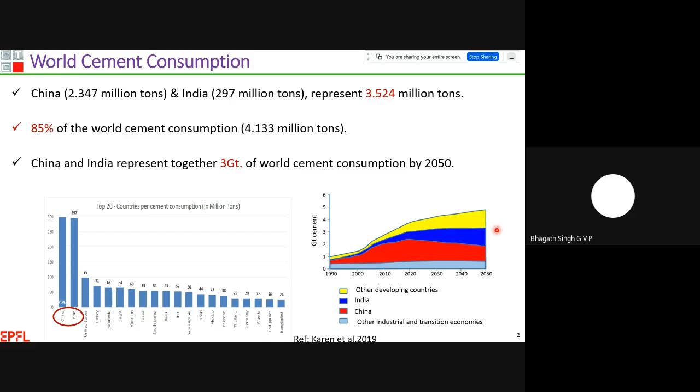During the cement production process, we release about 5 to 10% of anthropogenic carbon dioxide into the atmosphere, and we also consume virgin materials such as limestone and clay. Considering all these factors, we have to work towards the development of alternative sustainable materials to meet the required demand of cement in the construction sector.

If you look at the composition of the earth's crust, it generally consists of predominant elements: silica, alumina, iron, calcium, sodium, potassium, magnesium, and others. Whatever materials we use or produce, these elements should more or less be present in those materials. Let me show an example—this is the typical composition of the earth's crust.

If you compare this with cement composition, the same elements are present but in various quantities. In the earth's crust we have a significant quantity of silica as sand or clay, whereas in cement we have significant calcium, followed by silica, alumina, iron, and other elements. What I'm trying to say is that whatever materials we produce, these elements should be present in different quantities.

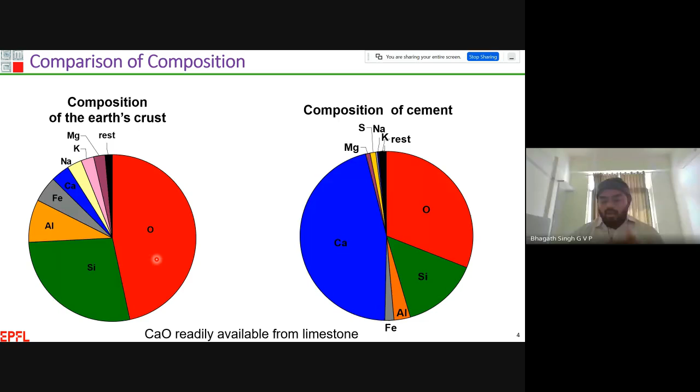By considering this as a baseline, the question is: what source materials do we have available in our locality to meet the cement composition? Do we need to rely only on clinker to produce cement? We have to use clinker somehow, but we also have other supplementary cementitious materials that can partially or fully replace cement or clinker.

What are those materials available? We have limestone from limestone quarries, fly ash from the thermal industry, slag from the iron industry, natural pozzolans, and significant quantities of clay available in our locality. On top of this, we have other industrial waste materials such as rice husk ash, microsilica, and silica fume, but local availability is very important for these waste materials.

Comparing the various materials available in our locality, among all of them I have chosen to focus towards industrial waste material, because we have to somehow utilize industrial waste for various construction applications rather than consuming virgin materials. As sustainability moving forward, I would like to focus on developing new cement formulations by utilizing various industrial waste materials.

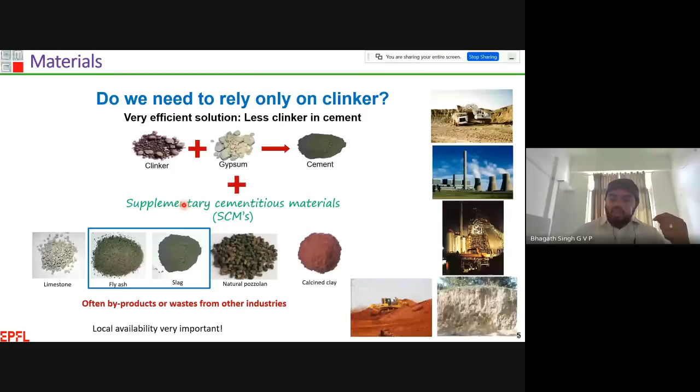To reach my goal, I have chosen fly ash as a waste material to produce alternative binders. Why fly ash? If you look at the fly ash generation and utilization percentage scenario in India over the past few years, ash generation is increasing year by year, but we are only able to utilize about 55 to 65% of fly ash for various applications, and the rest is lying on the earth.

Currently, out of 197 million tons of fly ash generated, 67% is being used for various applications. Of that 67%, about 25 to 30% is utilized in the cement and concrete sector, and the rest is for other applications.

Why are we unable to increase fly ash utilization in the cement and concrete sector? It is limited due to heterogeneity as well as variability in composition, as fly ash varies from source to source and even within the same source.

Our goal is to increase fly ash utilization, especially in the cement and concrete sector, as India is a developing country where construction activity is picking up, and we need a massive quantity of concrete in the next few years. Because of this, we have to develop alternative source materials and alternative binders to meet the required demand of cement and concrete in the construction sector.

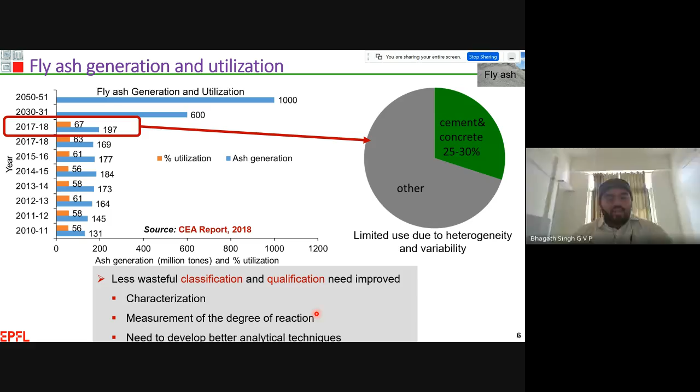The second point is measurement of degree of reaction. When we use fly ash as a binder over a period of time, how much of it reacts and how much remains non-reactive? How does the dissolution characteristics take place in various environments? Does the glass present in the fly ash dissolve, or does it sit idle in the system? All these things should be understood before using fly ash in construction applications.

On top of this, we have to develop better analytical techniques to identify and quantify the reaction pathways and quality assessment within a shorter span. Whatever methodologies are available as per our code, and the existing methodologies, all require much longer time to get reactive silica, reactive alumina, and other parameters in fly ash. We have to develop better analytical techniques to assess the fly ash mechanism.

After considering all these factors, I have developed various methodologies in my research. As fly ash is an industrial waste material that everybody knows, my point here is that fly ash consists of glassy particles as well as crystalline particles.

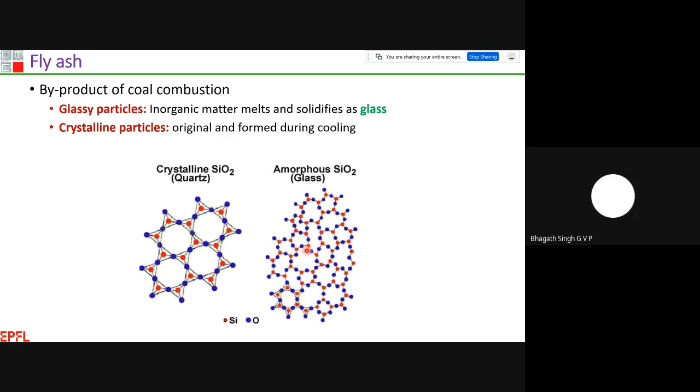The crystalline particles, for example quartz, are nothing but a proper orientation of silica and oxygen atoms in the structure. Whereas the amorphous glass is an irregular arrangement of silica and oxygen atoms in the structure.

Coming to the practical issues, fly ash is classified into two categories: one is siliceous fly ash, also called class F fly ash, and the other is calcareous fly ash, typically called class C fly ash.

Coming to the siliceous fly ash, we have significant quantities available in India. The main disadvantage is its very slow reaction - we have to wait much longer time for it.

Excuse me, can you please mute yourself? I'm getting a lot of noise here.

Coming to the calcareous fly ash, its availability is quite low compared to siliceous fly ash, but it's more reactive and also very heterogeneous and variable. Most class C fly ash is utilized in various locations and sectors. In my research, I have focused mainly on siliceous fly ash, as significant work has already been carried out on class C, and we are already using class C very efficiently in various applications.

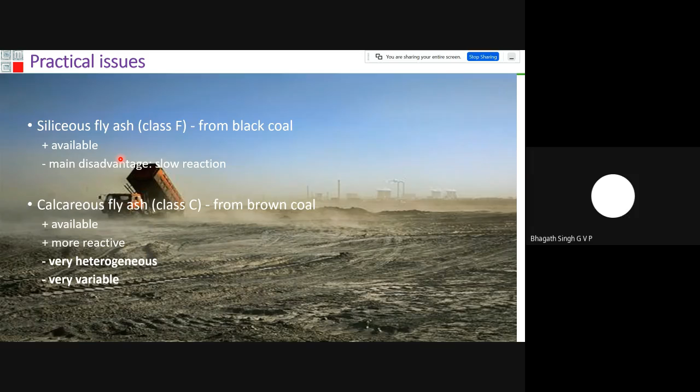Coming to class F fly ash, the main disadvantage is the slow reaction. How can we overcome this problem? How can we efficiently utilize siliceous fly ash, especially class F fly ash, in the cement and concrete sector?

Here I have used sodium silicate or sodium hydroxide as alkali activators to activate the fly ash. The whole process involves various steps. The first and essential step is the characterization of fly ash and identification of its individual reactive contents, as the fly ash has different particles in different sizes and shapes.

Firstly, I tried to understand the fundamental behavior of the fly ash - how does it behave once we receive it from the thermal industry, what is the reactive portion, what is the non-reactive portion, and how much dissolution takes place. All these factors I identified once I received it from the thermal industry.

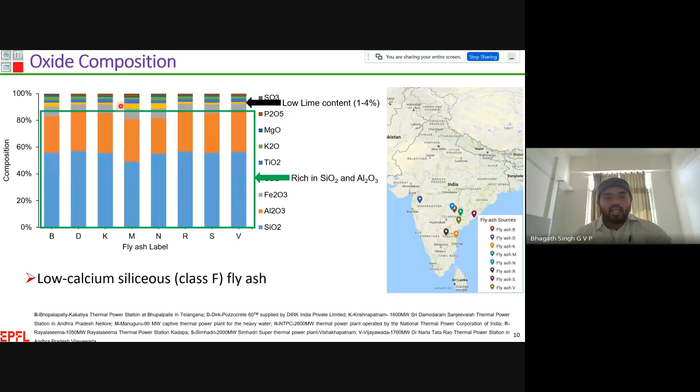As you can see, all these fly ashes predominantly contain silica and alumina, about 75 to 85% silica-alumina content present in most of these fly ashes. They are rich in silica and alumina, and thereby we see a very low lime content - the calcium content varies from 1 to 4% in all these fly ashes, along with other oxide composition.

Finally, as per our IS standard, these fly ashes are classified as siliceous fly ashes. But I have further divided it into low calcium siliceous fly ash. Even though it's siliceous fly ash, I would like to call it low calcium siliceous fly ash.

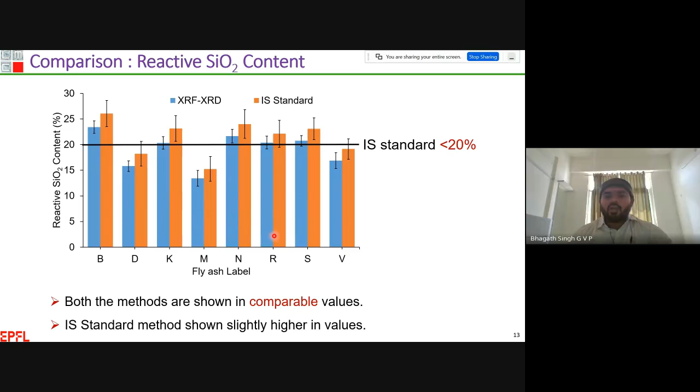I'm showing this plot because we can use either the XRF-XRD technique or the IS standard methodology, but both show more or less similar results. The IS standard method shows slightly higher values, likely because some particles are sensitive to acid and may dissolve, so proper precautions must be taken while doing the acid-based methodology. This is one of the correlations I have drawn from all these fly ashes.

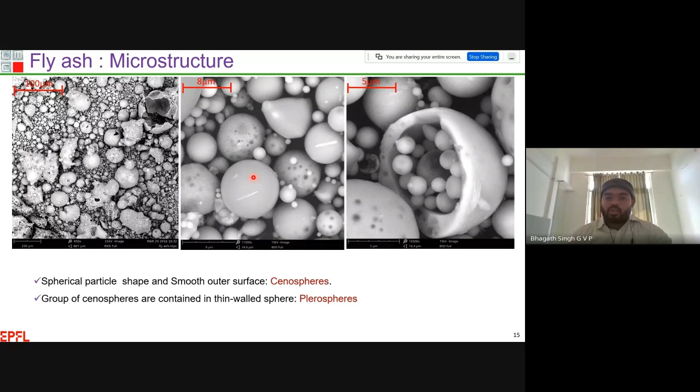Once I identified the various morphologies, the reactive and non-reactive potential, and the total amorphous content, I went one step further to identify which type of glass is present in our fly ash.

As I said, all these particles are rich in alumina and silica. But we need to identify which type of glass it is - whether it's calcium aluminum silicate, iron aluminum silicate, or only aluminum silicate glass.

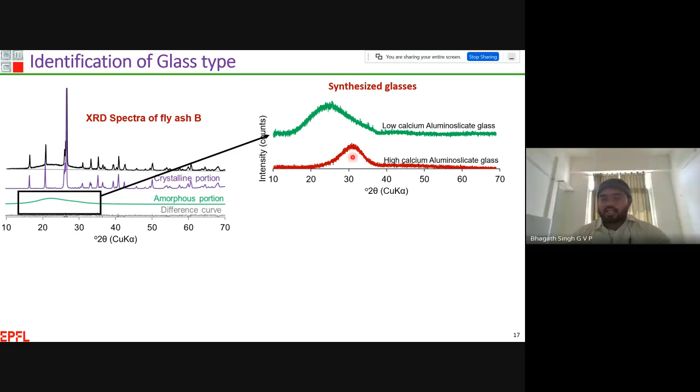Comparing these two glasses with our fly ash signature and the amorphous portion signature shown here, it's evident that our Indian fly ashes, especially the siliceous fly ash, contain low calcium aluminum silicate glass, which has a well-defined center around the 2θ angle of about 22. This amorphous hump is attributed to the plerosphere and cenospheres present in our fly ash.

It was evident by the previous EDX analysis that these particles are rich in aluminum silicate glass, but we had not defined whether it was calcium rich or low calcium. But based on our synthesized glasses, it was evident that most of these fly ashes contain low calcium aluminum silicate glass.

Once I identified the glass, I carried out dissolution studies to understand how the glass behaves in various environments. Before that, I tried to identify the total glass content present in our fly ash using an existing methodology - 1% selective HF acid dissolution - comparing it with the XRD technique I used throughout my research.

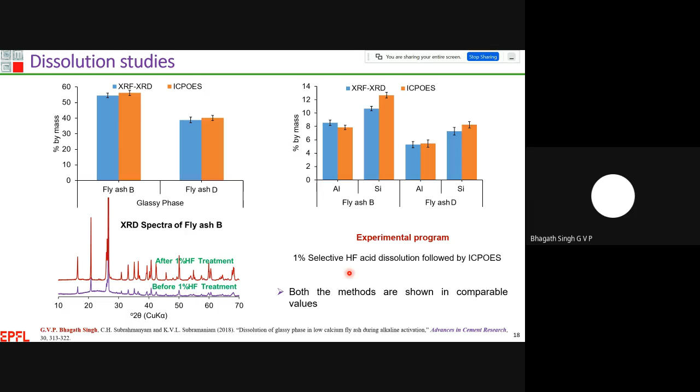As you can see here, this is the XRD spectra before HF treatment. After HF treatment, the whole amorphous portion is completely dissolved without affecting the crystalline phases, which means that the HF acid dissolution will dissolve only the amorphous, glassy portion, not the crystalline phases. But this treatment is very sensitive to time.

We have to restrict the time while doing this methodology. If you exceed the time limit, then it will dissolve some of your crystalline phases as well, as I have observed in those values, but I'm not presenting here.

I tried to compare this existing methodology with the XRF and XRD technique using different fly ashes. One had about 50% total glass, another fly ash was about 40%. Both methodologies fairly match, with very little difference.

But I will not prefer the HF acid dissolution because it's a very harsh treatment and we have to wait much longer time to achieve the result.

Once I identified the glass type, I studied how the glass signature changes over a period of time. Once we use the fly ash in various alkali environments, or for example in high volume fly ash or other applications, we examine whether the fly ash glass is dissolving, whether the crystal phases are dissolving over time, and what happens when this fly ash is attacked with hydroxyl ions.

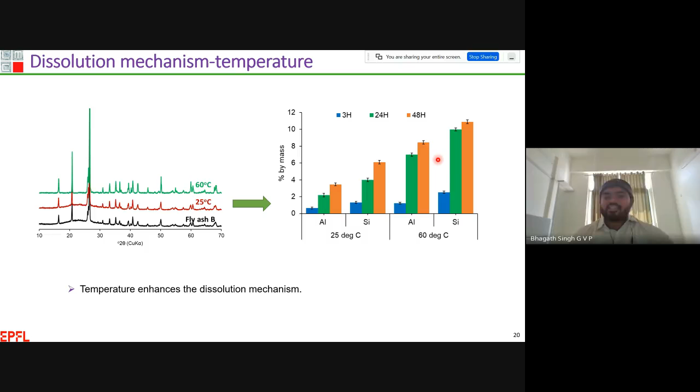Most of the fly ash is dissolved by 48 hours at 60 degrees Celsius, but at 25 degrees Celsius we have to wait much longer. At 25 degrees Celsius, you see a steady release of reactive species into the solution, whereas at 60 degrees Celsius, most of the fly ash is dissolved by 48 hours. So duration and temperature clearly enhance the rapid dissolution of glass and release of reactive species into the solution.

Coming to the second part of my presentation, it's about the characterization of the product. So far we've discussed identification and dissolution characteristics of these fly ashes. Now I'm moving towards characterization of the reaction product.

What happens once the alkali activation takes place? We mixed fly ash with an alkali activator and cured the sample. Finally, we get some product. Which type of product is it, and how much quantity of product is formed in the system? We have to correlate this with the compressive strength—how the compressive strength correlates with the reaction product as well as the dissolution mechanism.

I'll quickly go through this methodology.

This is the XRD signature of fly ash B. As you can see, we have different crystalline phases along with the broad amorphous hump, and this amorphous hump is the glassy phase of the fly ash.

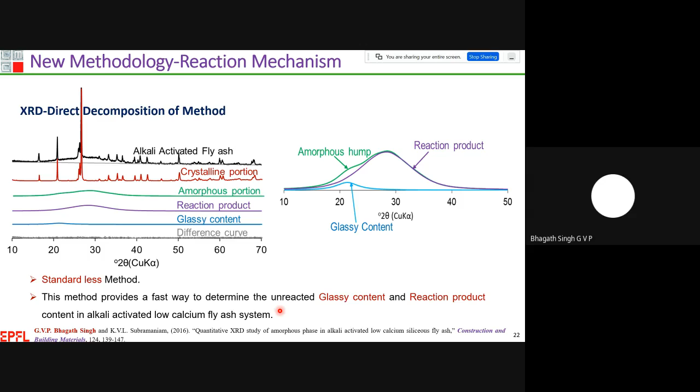It requires only the XRD signature of the fly ash and also the alkali activated fly ash. This method provides a fast way of determining the glassy content and reaction product content in the activation system, and also helps predict the reaction kinetics in the alkali activated system.

In my research, I have used the XRD direct decomposition method to quantify and identify the reaction kinetics in an activated system, especially to determine the glassy content as well as reaction product. And coming to the third part of my presentation, it's about the strength point of view.

How do various process variables influence the compressive strength? This is a key contribution to this research field. Then I have introduced a total reactive oxide ratios approach to produce stable fly ash based geopolymers irrespective of fly ash source without affecting its performance. I'll try to explain what I have done in this process.

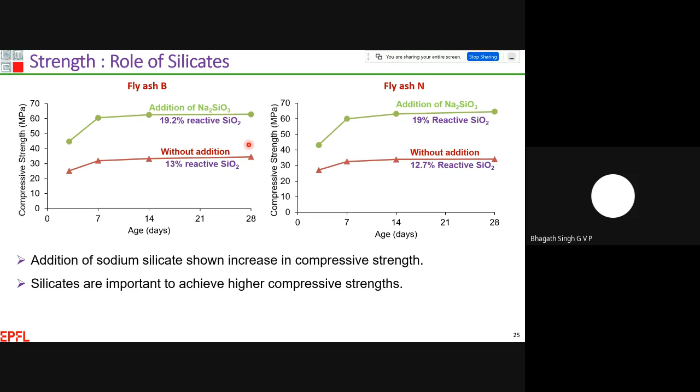With the addition of sodium silicate, the values shown are without addition, which has about 13% reactive silica. Once I increased the reactive silica from 13% to 19%, I saw a significant difference in the compressive strength at any particular time. With 19% reactive silica, I achieved about 63 megapascals compressive strength ultimately, but with 13% reactive silica, I achieved only about 32 megapascals. Due to this, silicates are very important to achieve the ultimate higher compressive strength in the activated mixes.

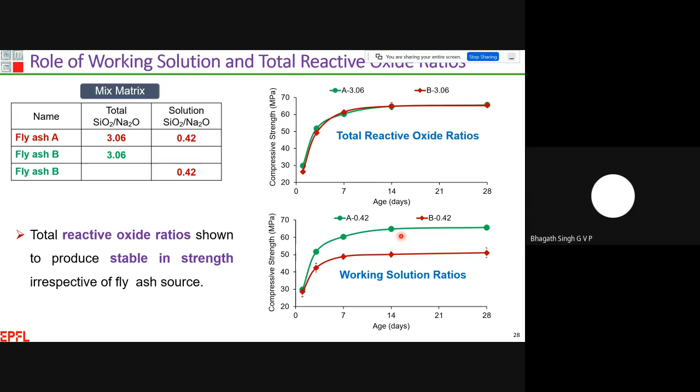As you can see here, the total reactive oxide ratio mixes, at any particular time, both fly ash sources show similar compressive strength with respect to fly ash source. Whereas the working solution ratios, if I apply as literature says—fly ash A solution ratio to fly ash B—you can see a significant difference in compressive strength. The results clearly illustrate that the total reactive oxide ratios are key to producing similar compressive strength with respect to fly ash sources, not the working solution ratios.

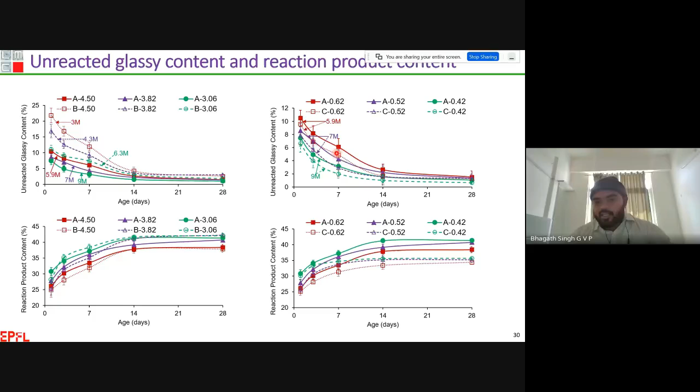Then I tried to understand how the dissolution mechanism as well as product formation takes place in these fly ashes. As you can see, the total reactive oxide ratio mixes are almost dissolved by 14 days, with no much difference from 14 to 28 days. Most of the fly ash is dissolved by 7 days. But in case of working solution ratios, you can see a slow decrease in the unreacted glassy content, and the results are more or less similar overall.

The only thing is that when we are maintaining the total reactive oxide ratios, we have higher silicates and the molarity is more or less high compared to 3 molars. That is the reason we are able to achieve higher compressive strength in case of total reactive oxide ratio mixes. If you compare the reaction product content irrespective of fly ash source in various mixed proportions, both fly ashes show more or less similar reaction product content, which already replicates the compressive strength development shown in the previous slides.

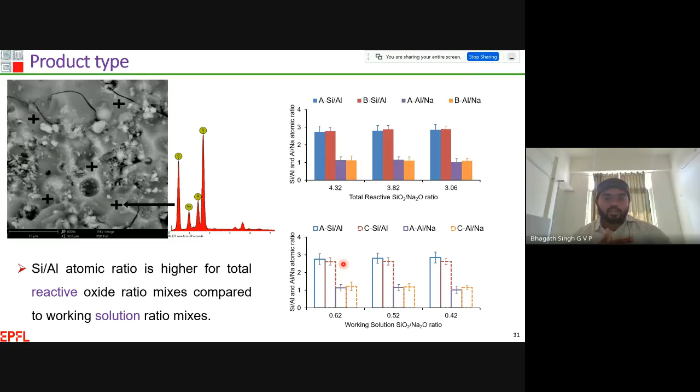We have to balance those ratios and quantities. Then only we can achieve similar products as well as similar ratios in the system. Thereby, we can produce stable fly ash-based geopolymers irrespective of fly ash source.

I have mentioned that the total reactive oxide ratios are key to produce similar compressive strength. Then what is the optimum reactive ratio? I have varied the silica to alumina ratio from 1.8 to 2.3, and also the alumina to sodium ratio from 2 to 2.5, with respect to age at 1 day, 3 days, 7, 14, and 28 days.

The increase in the ratio from 1.8 to 2 clearly enhanced the compressive strength. But increasing the ratio beyond 2 shows no much improvement in strength after 7 days. We see a reduction in compressive strength at early stages, at 1 day and 3 days. But after 7 days, there is no much improvement or reduction in compressive strength by increasing the ratio beyond 2. Thereby, the optimum silica to alumina ratio is 2 to produce stable fly ash based binders, irrespective of source.

Coming to the alumina to sodium ratio, increasing the ratio beyond 2 does not help much to improve overall compressive strength from 7 days to 28 days. The optimum value will be 2, the alumina to sodium ratio will be 2 as well as 2.5. Maybe you can use less than 2.5 to produce the optimum value.

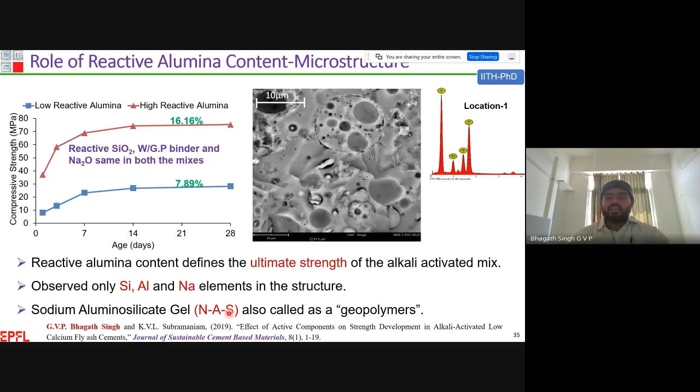The molarity will help to dissolve the glassy particles in our system. Literature says increasing the molarity will improve the compressive strength - no, the molarity helps dissolve the glassy particles in the system. Thereby, whatever reactive species is available in our system will precipitate, leading to formation of sodium aluminosilicate gel.

Coming to the role of water to binder ratio, I have used two different water to binder ratios. Here the binder is what we'd typically call water to cement ratio, but instead of cement I have used the binder, which is the binding material - fly ash as well as alkali activators.

I determined the specific surface area of these two materials at 28 days. With 0.19 water to binder ratio, the mix has lower specific surface area, whereas with 0.27 the specific surface area is about 17.26 meters squared per gram. The specific surface area also clearly plays a major role in strength development, but we should not use a higher water binder ratio if we want to achieve higher compressive strength in our fly ash based binder. We are still working on this component currently.

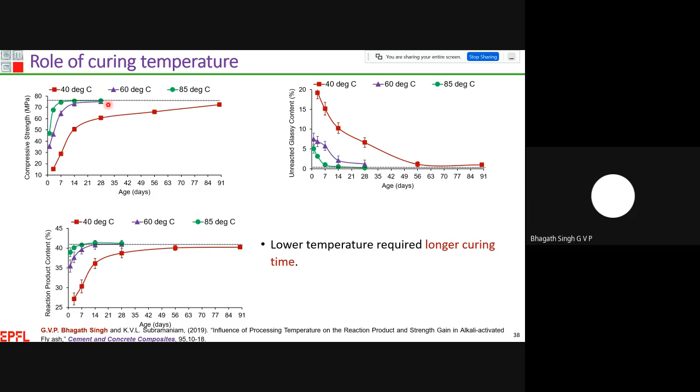As you can see in the compressive strength development, in case of 85 degrees Celsius, I achieved 100% compressive strength by 7 days, with no much improvement thereafter. In case of 60 degrees Celsius, I see a steady increase in compressive strength till 14 days, achieving maximum strength by 28 days.

But in case of 40 degrees Celsius, the strength is steadily increasing till 90 days. With lower curing temperatures, we have to wait much longer curing time to achieve similar compressive strength as with other curing temperatures, provided the total reactive contents and total reactive oxide ratios are maintained the same - you see these trends. If you're using working solution ratios, you will not achieve the compressive strength at 40 degrees. This is with the pure fly ash system - we have not used any slag and also no additives.

We would like to use only pure fly ash, so we can control the other parameters. Looking at the unreacted glassy content and the reaction product content, the compressive strength is proportional to the reaction product and inversely proportional to the unreacted glassy content.

In all these three mixes, everything is the same, only the curing temperature is varied across three levels. At 40 degrees Celsius, dissolution takes place very slowly. In case of 60 to 85 degrees Celsius, dissolution is complete by 7 to 14 days.

We also tried to identify which type of product is formed at these curing temperatures. If you increase the temperature from 40, 60, to 85, the silica to aluminum atomic ratio shows more or less a similar trend to the compressive strength.

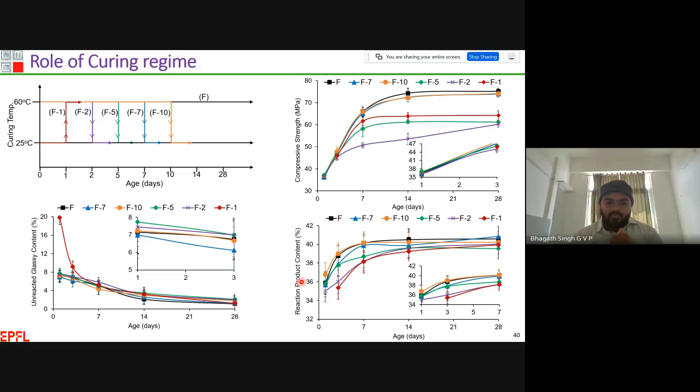I observed a similar trend in the unreacted glassy content and the reaction product content. Whenever I increased or decreased the temperature, I saw a drop in the reaction product as well as a drop in the unreacted glassy content.

We also tried to identify the product type formed in the system, and at all locations we found only silica, alumina, and sodium incorporated in the reaction product. Even though we changed the temperature from 60 to 25 or 25 to 60, the product content remained the same.

This is another interesting finding from our research: how the product type clearly influences the ultimate strength. As I mentioned, the silicates and the reactive alumina content are important, so we examined how the silica to alumina atomic ratio in the structure ultimately influences the ultimate strength.

I have designed two mixes using the same mix proportions but two different methodologies, named method 1 and method 2. In method 1, I have cured samples for 24 hours at 27 degrees Celsius, followed by curing at 60 degrees Celsius until 28 days. In method 2, I have cast the specimen and continuously cured it at 60 degrees Celsius until 28 days. Then I determined the compressive strength at 28 days.

I have determined the reaction product content, the silica to alumina atomic ratio, and the unreacted fly ash content. The silicon to alumina atomic ratio is placed on the x-axis, the left y-axis represents compressive strength, and the right side represents reaction product content.

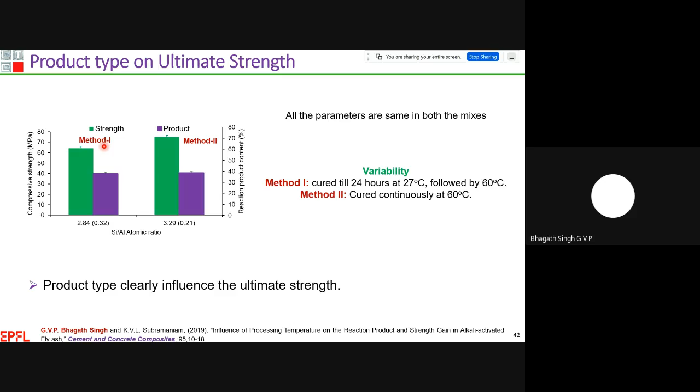If time permits, I would like to show some of our trials. With this background, we carried out concrete trials at our laboratory when I was at IIT Hyderabad. I designed two mixes. Mix one is 30% binder, which consists of fly ash, sodium silicate, sodium hydroxide, and water, with coarse and fine aggregates. Mix two is 40% binder and 60% coarse and fine aggregates, expressed as weight fractions.

We conducted a few workability trials at our laboratory. At 70% aggregates, further divided into 60% coarse and 40% fine aggregates, I observed the slump immediately after casting once we lift the slump cone, getting a 120 slump. After 3 minutes, the slump had completely collapsed.

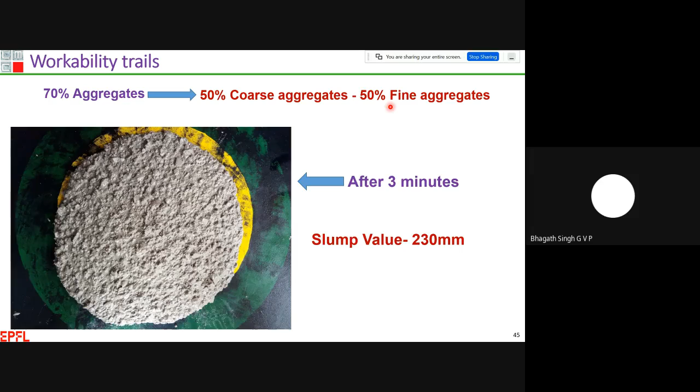Changing the proportion to 50% coarse and 50% fine aggregates, after 3 minutes I observed a slump value of about 230. Similarly, at 60% aggregates with 60% coarse and 40% fine aggregates, once we lifted the slump cone, I observed a spread like this, with a value near 380 slump, both immediately and after 3 minutes.

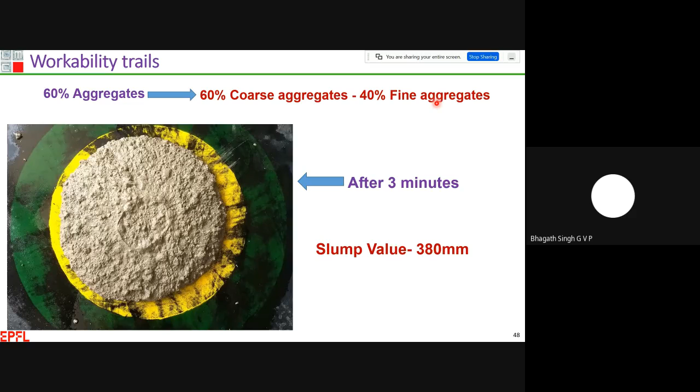These are all trials where we varied the coarse aggregate content, the fine aggregate content, and the total aggregate content at 70% and 60%, to see whether this fly ash geopolymer could be used as self-leveling concrete.

These are some of the laboratory trials we conducted. Maybe I don't know why it's not coming up. Let me take this.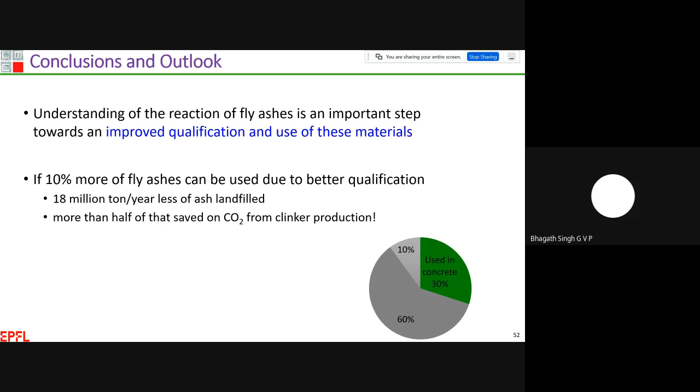The conclusions and also the outlook of the overview. If you ask me to give an overview, our intention is we would like to improve the fly ash utilization in the cement and the concrete sector.

We can utilize it efficiently because we are using fly ash in various applications, but how efficiently are we using it and for what purpose? Our intention is we would like to use it in the cement and concrete sector. Thereby we can reduce the carbon dioxide footprint in the atmosphere if we're able to utilize this fly ash in the right way.

As researchers, scientists, and industry people, as civil engineers and material science and chemistry experts, our goal is to predict exactly what happens between the material property and the performance. As engineers, we worry about the performance.

This is the compressive strength I want, this is the fracture behavior I want, and we worry about how durable our material is. As engineers, we should be able to predict exactly what happens at a fundamental level, or the fundamental behavior of the material, and how the material behaves once we have received it from industry.

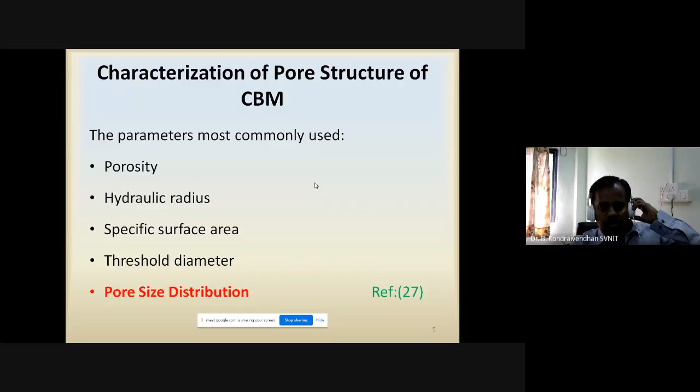I am going to characterize the cement-based material based on pore size distribution only. Pore size distribution means how the pores are dispersed or distributed in the cement-based material. Generally, there are two types of pore size distribution: cumulative pore size distribution and differential pore size distribution.

If you plot a graph between cumulative pore volume in cc per cc, that is cubic centimeter per cubic centimeter, versus pore radius, it is called cumulative pore size distribution. If you plot a graph between minus dV by dLNR versus LNR, that is called differential pore size distribution. These are the two different types of pore size distribution, showing how the pores are distributed in the cement-based materials.

Now I am going to talk about the entry radius, that is the pore radius, which I am calling r0.5, or the mean distribution radius. And D is the dispersion coefficient, which is nothing but the distance between the pores.

At the early stage, the pore sizes are very big, maybe coarser size. Over the period of time, a substantial degree of hydration takes place, so automatically the pore sizes will reduce. More and more CSH will form, the pore size will reduce, so r0.5 will also reduce. But at the same time, the dispersion coefficient value will increase.

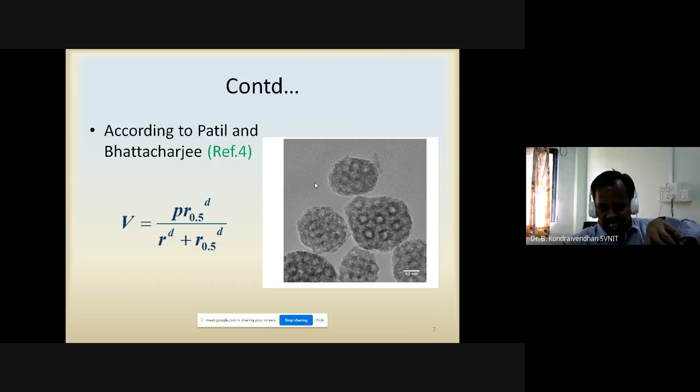So why do we have to study pore structure characterization? Because in the last few decades, concrete technologies have focused attention towards the microstructure, since the microstructure influences the long-lasting service life of structures. Even though we design a structure, before reaching its design life, the structures show some distress or deterioration. Until we understand the microstructure, we cannot increase the service life of concrete structures. That's why we have to study the microstructure. Generally, the strength and durability of cement-based products are governed by the microstructure only, and even within the microstructure, the pore system and porosity are the main things.

Those two things play a decisive role in influencing the physical and mechanical properties of the concrete. The pore structure of the cement paste mainly governs the physical and chemical resistance against the aggressive environment, strength, and thermal conductivity. Apart from that, ITZ, the interfacial transition zone, is the space between the cement matrix and aggregate, that also comes into this microstructure.

One has to understand the microstructure, then only we can improve the long-lasting service life of the structure, because nowadays we are bringing a lot of new materials and mixing them into the cement matrix. So we should understand the microstructure, how it confines the pores, how it makes an impermeable nature, and how it increases strength and durability. Everything we can understand through the microstructure only. So let us discuss what is the microstructure of cement-based material.

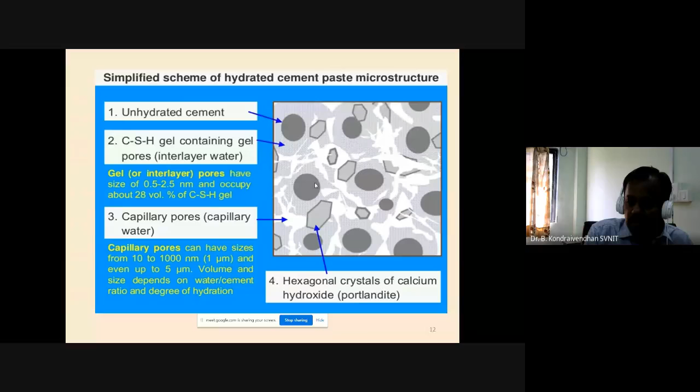You can also find some hexagonal crystals of calcium hydroxide, otherwise you can say it's Portlandite. This only gives alkalinity to the concrete. That's why initially concrete has alkalinity, varying in pH around 12 to 13.5. A good concrete has a pH of 12 to 13 due to the presence of Portlandite, which is liberated from the primary hydration reaction.

Once you talk about porosity and pore size, this only contributes to the strength and durability of cement-based materials. So how can we measure the porosity and pore sizes? There are so many methods available.

These methods include the fluid displacement method, helium pycnometer method, capillary condensation and adsorption-desorption isotherm, small angle X-ray scattering method, scanning electron microscope, nuclear magnetic resonance or NMR, AC impedance spectroscopy, mercury intrusion porosimetry, and backscatter electron images.

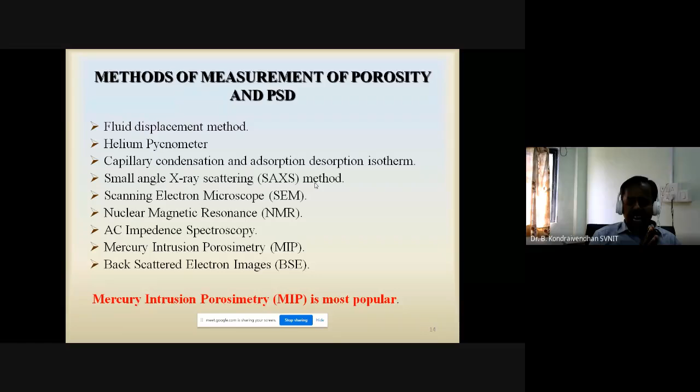Among these methods, mercury intrusion porosimetry is the most popular. As soon as I say MIP is the most popular, a question pops up in your mind - why is it so? It's because MIP can measure 1 nanometer to 200 micron sizes, and it can produce reproducible pore sizes. The resistance offered by cement-based material to external agencies is governed by the pore entry radius rather than the true internal radius.

MIP can measure the pore entry radius, and also it measures the permeable porosity, which covers most of the interconnected pores, which has direct relevance on durability.

MIP can measure, during extrusion and intrusion, the interconnected pores, which are very important and related to all durability issues. If you have interconnected pores, then the problem will progress aggressively. If we have isolated pores, there is no problem at all. So once you have interconnected pores, all durability related issues are related to them. This is the only instrument available to measure interconnected pores, that's why mercury intrusion porosimetry is so popular.

I would also like to explain other methods - what their principles are, and what pore size each can measure. MIP, as I mentioned earlier, can measure 1 nanometer to 200 micron sizes. It is based on the principle of the Washburn equation, and uses a non-wetting liquid, mercury, to measure pore entry sizes. I will talk about MIP in more detail in the further slides.

Next, the helium inflow technique can measure pore size from 1 nanometer to 8 nanometer. The flow of helium with time is measured, and it measures the microspace between the CSH layers.

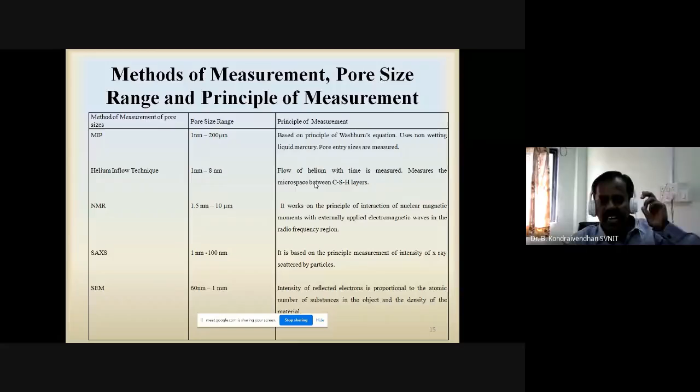Now we can see what is wetting liquid and what is non-wetting liquid. Wetting liquid means the contact angle between the solid and the liquid is less than 90 degrees, then it is called a wetting liquid. If the contact angle between the solid and the wetted surface is more than 90 degrees, that is called a non-wetting liquid.

So here you can see, non-wetting liquid contact angle is more than 90 degrees. Mercury is one example of a non-wetting liquid, and water is one example of a wetting liquid. Whenever we put water on the surface, it will not remain as it is, it will flow. It is spreading on the surface because the contact angle is less than 90 degrees. That's why it is spreading on the surface.

So now you can differentiate what is wetting liquid and what is non-wetting liquid. If the contact angle is less than 90, it is wetting liquid. If the contact angle is more than 90, it is non-wetting liquid. So mercury is a non-wetting liquid. Even though it is spread on the surface of the plank, it is not going inside the cracks. Unless you apply some external pressure or force, it will not go inside the cracks, it will remain on the surface only. It retains its shape and remains on the surface, it does not spread on the surface at all.

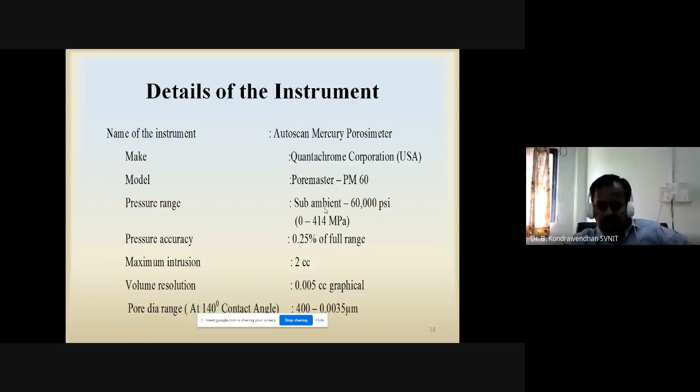As I mentioned earlier, mercury intrusion porosimetry is based on the Washburn equation. Mercury behaves as a non-wetting liquid because its contact angle is more than 90 degrees, having a value of 135 degrees. That's why it is a non-wetting liquid, and it does not penetrate openings and cracks.

As shown in an earlier slide, even though mercury is spilling on a plank which has a number of cracks, it does not go inside the opening or cracks unless you apply some external pressure or force. The pressure required is a function of the contact angle of the mercury and also its surface tension. These two parameters govern the Washburn equation: P equals minus 2 sigma W cos beta by R, where sigma W is the surface tension of the liquid, beta is the contact angle of the liquid, and P is the pressure.

Because here we are applying pressure, that's how we are penetrating the mercury inside, injecting the mercury inside the sample. That's why it follows the Washburn equation.

In mercury intrusion porosimetry, we apply the mercury with high pressure. One time we apply the intrusion, and then we do the extrusion, taking back the mercury. We do a number of such cycles, and that's why we get this kind of graph. Curve 1 and curve 2 show first the intrusion, then extrusion, then again intrusion happening, but you can see some mercury is trapped.

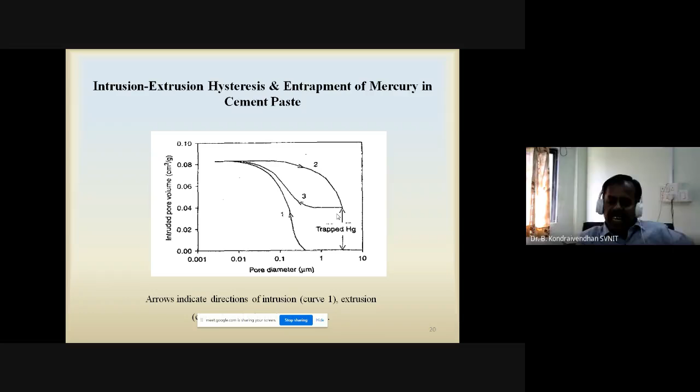Before starting this experiment, one has to determine the penetrometer constant. This is the penetrometer cell, and it is a glass cell only, but very sensitive because it can bear pressure up to 60,000 psi. While handling this glass cell, you should be very careful because each cell costs around 20,000 rupees, and sometimes we are dealing with hydraulic oil too. There is a lot of chance it may spill or fall down from your hand, and then it becomes bit difficult for you.

You have to procure it again from the USA. It will take more time, about a 6-month period you have to wait. So that's why we have to handle it very carefully.

Whenever we are going to use this penetrometer cell, first you have to determine what is the penetrometer constant. There are some procedures available, but I am not going through the procedure, I'll just simply tell you. For wherever you are going to use the penetrometer, accordingly you have to calculate what is the penetrometer constant. And again there are two types of cells available.

One has a capacity of 2 cc, and another one is 0.5 cc volume. If you are using 2 cc, then what is the penetrometer constant in the low pressure station, and what is the penetrometer constant in the high pressure station? First you have to determine this using the standard procedure. I am skipping this procedure, but just know that you have to determine the penetrometer constant. Then only you will get the accurate value.

As I mentioned, mercury intrusion porosimetry follows the Washburn equation, and the Washburn equation is a function of contact angle and surface tension. So one has to determine the contact angle and surface tension before operating this instrument. A number of people have done a lot of research on this, and there are different drying techniques used. Based on the drying technique, we have to choose the contact angle and surface tension.

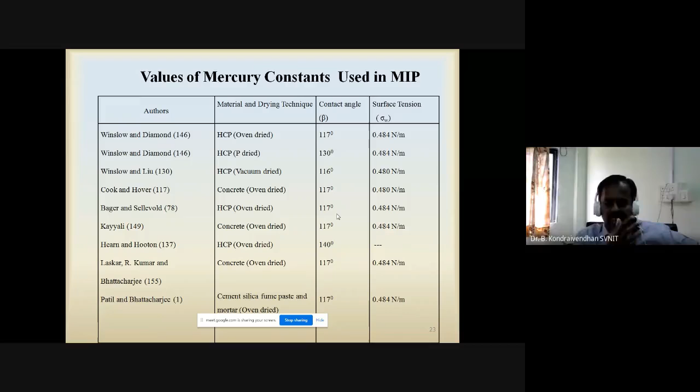For example, if you are using oven drying, then we have to take contact angle as 117 degrees and surface tension as 0.48 Newton per meter. If you are going for pressure drying, then you have to use 130 degrees and 0.48 Newton per meter. If you are using vacuum drying, then you have to take contact angle as 116 degrees and 0.48 Newton per meter. There is a lot of literature available, and based on the literature you have to choose the value and insert it into the software.

Now this is the operating procedure. This is also a very simple procedure, but it consumes more time. As I mentioned earlier, first you have to do the intrusion side, first the low pressure station. You have to clean the glass cell using isopropyl alcohol because it is very sensitive to dust. That's why every time you have to clean the glass cell and dry it in the oven.

Once it is ready, you have to keep your sample in the stem and cover it, following the set procedure. Then you have to insert the sample inside the low pressure station, and do the intrusion extrusion cycle. In the low pressure station, we apply pressure up to 50 psi maximum, and we get a cumulative intruded volume versus pressure curve.

Once you complete the low pressure station analysis, you put it in the high pressure station. There we are not using mercury, we are using high grade hydraulic oil. There we apply pressure up to 60,000 psi, and we get one more curve, which is also cumulative intruded volume versus pressure. That's how we have to do the operation.

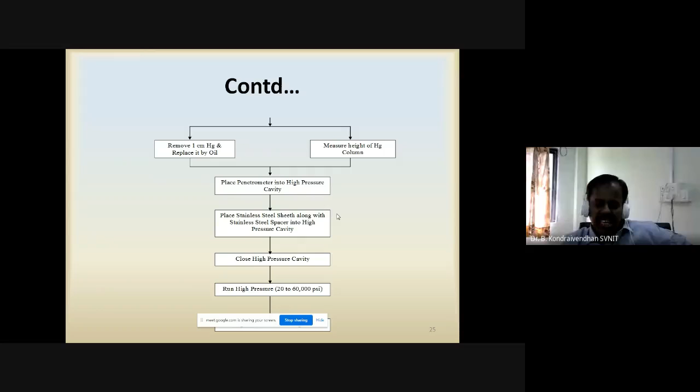Generally it takes around 1.5 hours for one sample, but for every mix we have to do at least 3 samples and take the average. This gives the average cumulative intruded volume versus pressure curve, done up to 60,000 psi. Taking the average curve is also not so easy, we have to use some software for that.

So far I explained how to use the mercury intrusion porosimeter, but now let me explain how one can actually perform with it. This concrete is a very complicated system, as I mentioned. We can predict the compressive strength, permeability, and everything through the pore structure parameters. As I mentioned earlier, the pore structure parameters are R50, D and P. P is the permeable porosity, R50 is the mean distribution radius, and D is the dispersion coefficient.

So this is a very complicated system, concrete. Even at the micro level, it is not easy to determine. This kind of research is very new, and we are pioneering it. If you want to determine the pore structure, we cannot directly do this kind of work in concrete. So we have to take the simplest system, which is cement paste only. First you try to understand the cement paste, then gradually move to cement mortar, then to concrete. Unless you understand the cement paste, you cannot go to concrete directly, because there are issues like ITZ that we are not able to understand properly. That's why we started with the simplest system, the cement paste.

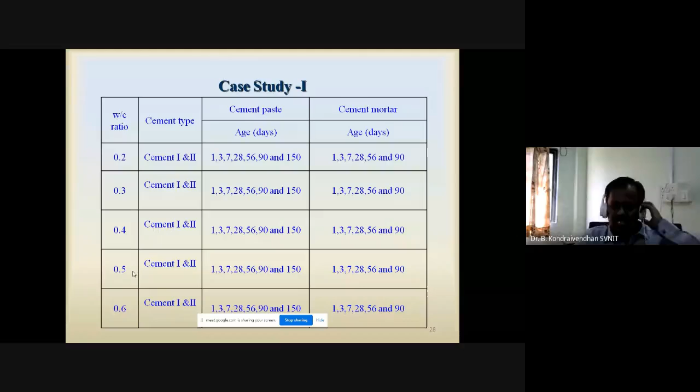We also tested for different ages, since one has to see how the pore structure varies over time. That's why we took ages from 1 day, 3 days, 7, 28 days, 56, 90, and 150 days for the paste. Whereas in case of mortar, we stopped the curing age at 90 days. That's how the initial test was carried out.

The sample is like this - we have to take a small sample only. Whenever we want to test the sample in MIP, there are three possible ways. One is to cast a small pellet-sized sample, about 9.5 mm diameter to 23 mm height, a circular specimen. Otherwise, you can take a core from a bigger sample, like a cube or beam, extracting a small bit of core of this size.

Otherwise, you can crush the concrete or cement paste and take crushed aggregate samples to test, but those will give erroneous results. The best way is to cast the sample of a limited size, since we cannot accommodate more than 9.5 mm diameter to 23 mm height. That's how the samples were cast, and we prepared this for both OPC paste and OPC mortar.

When determining the pore structure of cement-based materials, the intention is to determine the pore sizes. First, we have to ensure complete dispersion of the cement particles, which requires using a super plasticizer. If using a super plasticizer, we have to determine the optimum dosage.

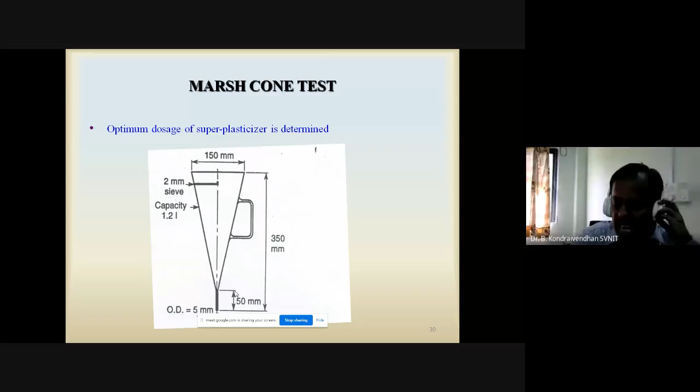You have to start the dosages from the lowest, like 0.25, 0.5, 0.75, and so on, gradually increasing the dosage while measuring the time taken. If you keep increasing the dosage, the time will become quicker. At one stage, even though you keep increasing the dosage, there will be no further reduction in time. That means there is an optimum dosage. Once you reach it, you stop. That is your optimum dosage, and that's how you determine the optimum dosage of the superplasticizer.

For the flow table test, you use cement mortar according to IS 1727. You prepare the cement mortar, place it in 3 layers, and give 10 blows in 6 seconds. Then you measure the spread diameter, which should be 110 plus or minus 10. That's how we get the optimum dosage.

Then we determine the optimum dosage of the superplasticizer for different water-cement ratios, and plot a graph between optimum superplasticizer dosage versus water-cement ratio for both cements.

Then we go for casting of the samples. For that, we have used this kind of mold. As I mentioned, this is the best way — instead of going for other methods, you can prepare samples of the required size, and it is very easy to demold.

Once you prepare the cement paste, you pour it inside the hole and keep it for 24 hours. After 24 hours, you simply remove the bolt and nut connection, remove the samples, and keep them in the curing tank for the required age.

Once the required age is attained, you remove the samples from the curing tank, but you cannot go for testing immediately. Then we have to arrest the hydration. How to arrest the hydration?

For example, if I want to determine the pore structure at 1 day age, 3 day age, I cannot immediately do the MIP test. That's why we are arresting the hydration. Even if you take the sample out of the water and keep it outside, hydration will continue because there is pore water inside. If there is pore water inside the concrete, air drying will happen, and hydration is a continuous, infinite process. That's why we have to stop the hydration.

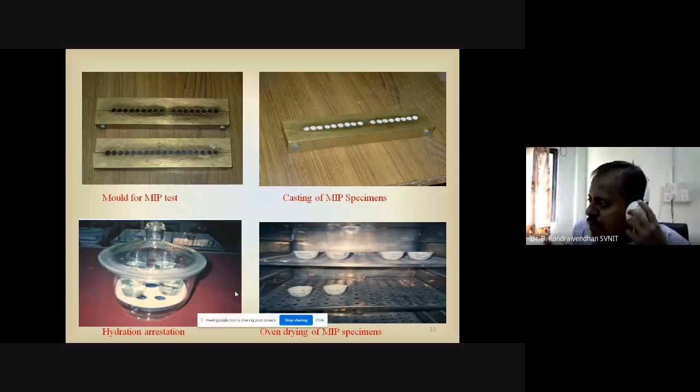Accordingly, we have to choose the theta and gamma values — that is, the contact angle and surface tension values. That's why we use 117 as the contact angle and 0.484 as the surface tension.

As I told you, there are 3 different drying techniques available. Here we have used oven drying; some people use vacuum drying, some use pressure drying. Here we adopted the oven drying method, so now the samples are ready.

If you look at the cross section of the penetrometer cell, it should be like this. Inside there is a cell where mercury can be filled — that is a 2 cc volume — and the sample should be kept in the stem. You can see the mercury will be filled here, and there is an electrical contact and a cap.

Actually we are applying pressure like this way only. Okay, so this is actually a cross section of the penetrometer cell, and every penetrometer cell is costing around 20,000 rupees. Everything you have to import from USA only, nothing available in India.

So it is better to keep more samples because there are a lot of chances of breaking this sample or the penetrometer cell also. This is the actual penetrometer cell. So whatever sample we cast, after hydration arrestation, the samples should be like this.

So once the low pressure is over, then we have to switch to the high pressure station. The high pressure cavity should be like this. Here we are using the hydraulic oil, and there we have to apply pressure up to 60,000 psi.

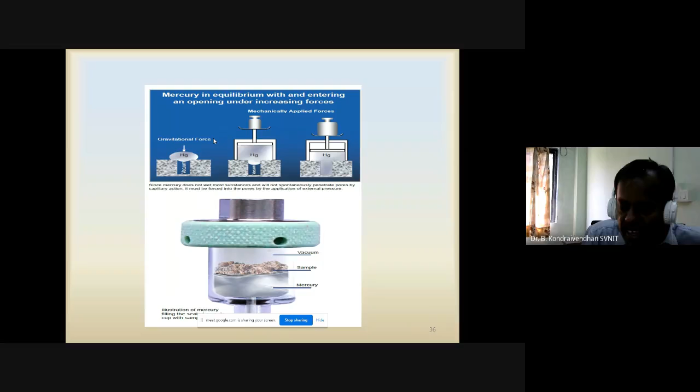That's how we have to perform the mercury intrusion porosimetry test. So here it is better explained how the mercury is penetrating inside. Actually you can see first we are creating the vacuum, then we are applying external pressure that is 60,000 psi. That time the mercury is entering inside, the vacuum is removed and it is entering inside. That's how the mercury is going inside the voids, and that's how we are measuring the porosity and pore sizes.

So next, how to calculate the average curve. Actually it is not so easy because we are getting three different cumulative intrusion volume versus pressure curves. Then we have to see how to take the average. For that we used a Morgan-Mercer-Flodin model. Actually this kind of model mostly biological science people are using.

Actually it is a freely available Curve Expert software, which we used. It's open source, anybody can use the software. From this curve we found it is an S-shaped curve and it has this kind of equation.

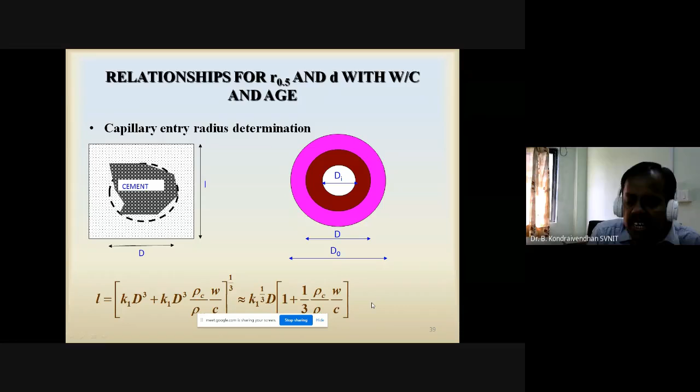Now looking at hydration, what are the physical changes happening? Initially the cement particle is an irregular shape - it should not be circular. But for design purposes, I cannot keep it irregular, so I convert it to a regular shape, a circular shape. I am assuming circular.

Now an inner product is forming - this is what actually happens in the hydration process. There is an inner product, C-S-H gel forming, then outer product forming, then there is unhydrated cement particle, then calcium hydroxide - Portlandite - is forming, and remaining there is capillary porosity forming. That's how the hydration actually takes place physically.

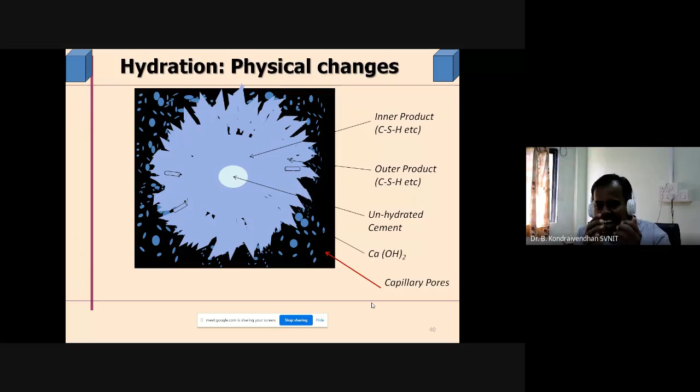This kind of thing you cannot find anywhere - how a single cement particle reacts. So that's what I explained here: initially inner product forms, then outer product, then there's unhydrated cement, then calcium hydroxide formation and capillary pores. These are all the things happening.

Then we can also determine the degree of hydration. Degree of hydration is nothing but the mass of cement reacted relative to the total mass of cement - it's a ratio between the mass of cement reacted to the total mass of cement taken. That's how we determine the degree of hydration.

We can also calculate the mass of water reacted within the unit cell, and the total mass of hydrated product, which is the summation of mass of cement reacted plus mass of water reacted. We can also calculate the volume of the solid product including the inherent gel pores - that is the difference between the inner product and the outer product. That's how we calculate the capillary entry radius, which is L minus D naught by 2.

So after simplifying this, we came to know capillary entry radius as a function of water cement ratio and alpha. Alpha is nothing but degree of hydration. Here K1, K3 and all are nothing but a shape factor. If you assume a circular shape, it will become pi by 6.

Then again, how to determine the degree of hydration? For determining the degree of hydration, we referred the literature. But in literature, there is no standard relation available. What I wanted was a degree of hydration as a function of water cement ratio and curing ages, but there is no such relationship available in the entire literature.

But fortunately we came to know there are 3 relationships available, but that also having some problems. Let me discuss what these are.

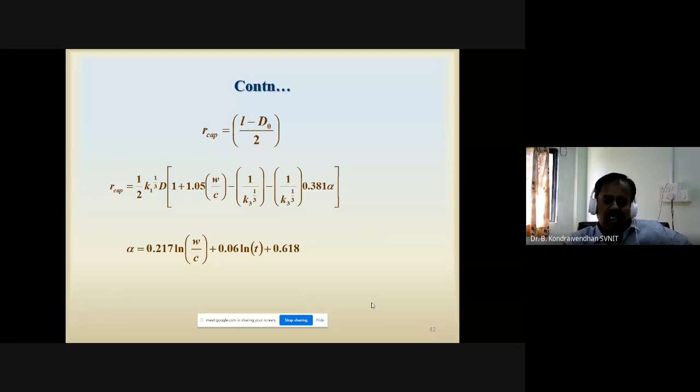Then we started some experiments in this direction. So what we did, we started determining the non-evaporable water content. The mixed water we use for mixing concrete or cement paste consists of 2 types of water. One is evaporable water, another one is non-evaporable water.

Evaporable water one can determine by heating the sample to 100 degrees Celsius. But how to determine the non-evaporable water? If you can determine the non-evaporable water, it is also possible to determine the degree of hydration. Because according to T.C. Powers, 1 gram of cement is having 0.23 gram of combined water or chemically bound water. This is already done and available in literature.

In 1960, he revealed this matter and did around 30 pages of experiments, and he came to know 1 gram of cement is having 0.23 gram of combined water. By using that concept, we can also determine the non-evaporable water content. So we have done the experiment on cement paste for both coarser and finer cement, and we have determined it according to T.C. Powers.

So non-evaporable water content can be determined using the formula W1 minus W2, by W2 minus LOI. Here W1 is the dried weight of the cement paste at 100 plus or minus 5 degrees, that is called evaporable water content. W2 is the ignited weight of the paste at 1000 plus or minus 50 degrees Celsius for 3 hours, and LOI is the loss on ignition.

If you determine this using the muffle furnace, you can determine this non-evaporable water content. So we have determined it for a number of samples, for different water cement ratios and different curing ages, experimentally. Once you know the non-evaporable water, we can also calculate the degree of hydration. Degree of hydration is nothing but non-evaporable water divided by 0.23, because 1 gram of cement has 0.23 grams of combined water.

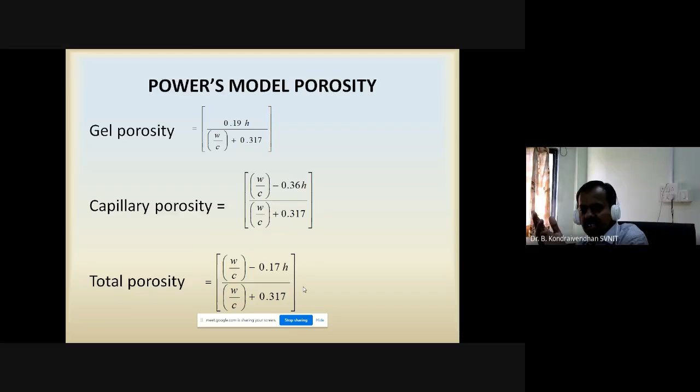But beyond the capillary segmentation, the pores are gel pores. If you look at a particular water cement ratio, it has a function R.5 gel equal to A by T raised to the power P, where A and P are functions of water cement ratio. It fits best, that's how we got the R.5 gel having this kind of relation.

Now finally, you can calculate the overall R.5. Overall R.5 is nothing but the weighted geometric mean of R.5 gel into P gel, and R.5 cap into P cap—or otherwise I can write it as Ln R.5 equal to that expression. Here P gel is the fraction of gel porosity to total porosity, and P cap is the ratio of capillary porosity to total porosity. That's how we got the relation for R.5.

Now one can calculate the mean distribution radius, or R.5, by using these 3 parameters. Any doubt?

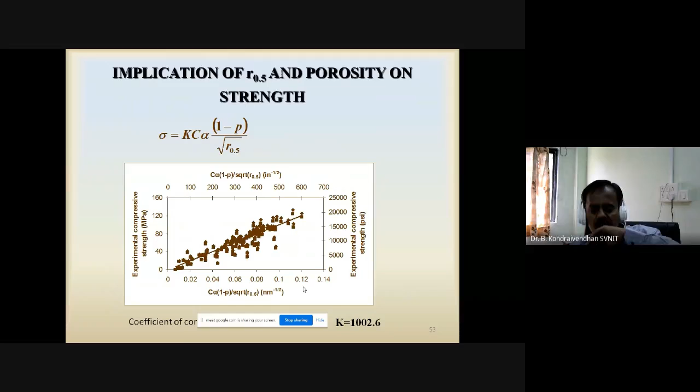Now I am talking about the implication or application. Why do we want to determine these? It is also possible to determine the compressive strength. Generally, if you look at the literature, mostly they have given compressive strength as governed by porosity only. Actually, that is not correct. The compressive strength is not only governed by porosity, it is also governed by pore sizes.

Only very few people have done this kind of work. Very early on, Atzeni did such work, incorporating pore sizes along with porosity. Later, Kumar and Bhattacharjee also gave such a relationship: sigma equals Kc into 1 minus P divided by square root of R.5. For cement paste, we slightly modified that, because in cement paste we have to consider the degree of hydration also. That's how we got sigma equals Kc alpha into 1 minus P divided by square root of R.5.

Here K is the proportionality constant that actually governs the modulus of elasticity of the cement matrix and also the surface energy, C is the cement content in the concrete mix, and alpha is the degree of hydration.

So to determine the K value, the constant of proportionality, we took around 200 experimental data points from the literature, and we plotted the experimental compressive strength data versus C alpha into 1 minus P divided by square root of R.5. From this we got K equal to 1002.6. So now we can predict the compressive strength.

Then again we have to check it, because we know Abrams' law, which states that strength is inversely proportional to water cement ratio. So now we can also estimate the compressive strength for different water cement ratios and different curing ages using a relation, and plot the estimated compressive strength against water cement ratio. That is also behaving in the same manner.

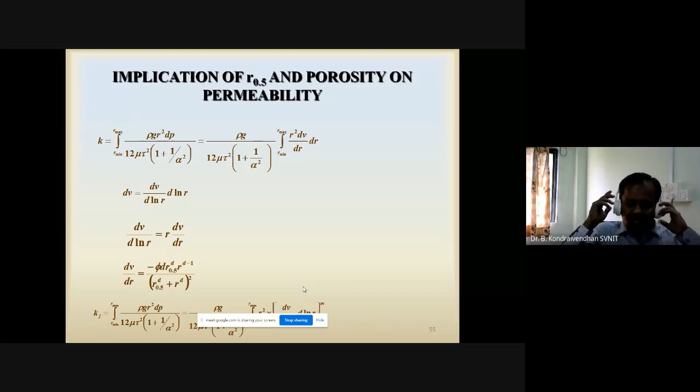So he gave the relationship for permeability. According to this relation, he kept the porosity as a linear function with permeability, but that is not true, because over the period of hydration, some segmentation is happening. That's why, according to Reinhardt and Weber, the porosity should be raised to a certain power m. That m is nothing but the interconnectivity factor. So one has to modify this relation. That's how we modified the relation, and we have to determine the m factor.

That is called the interconnectivity factor. For that, we have done some innovative procedure. We have taken a number of literature available permeability values and the corresponding water cement ratios and curing ages, and we have calculated through our estimated permeability.

We have taken the ratio between our experimental value and our estimated value. That is called the K ratio, and we have taken m value randomly, like 0.5, 1, 1.5, a number of values. Then we plotted a graph between K ratio versus m, and from the curve we got the actual m value. So we got the interconnectivity factor for the cement paste, m equal to 2.67.

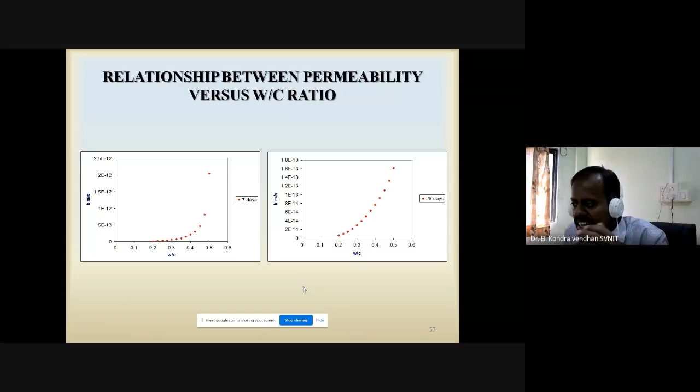Now by using this, we can also modify the permeability formula. Then we can plot the graph permeability versus water cement ratio, and we get this kind of curve. This kind of curve was also given by T.C. Powers in 1962. After that, nobody has done this kind of research. Now we can ensure that whatever prediction formula we have given is correct, because it is also following the same trend. We are happy with this outcome.

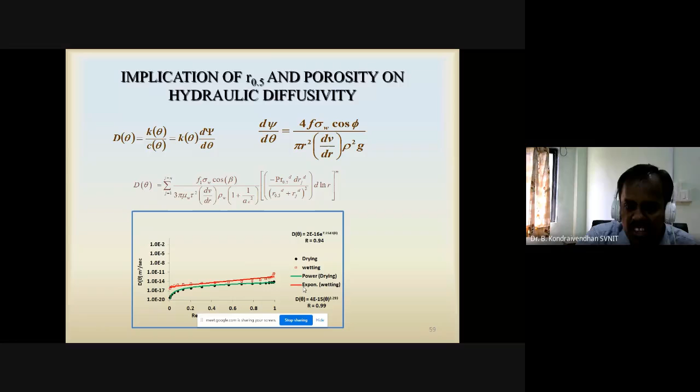So then we extended this work to cement sand mortar also. But here there is one complication, because once we introduce the sand particle, due to the wall effect and loosening effect of the particle, it induces some ITZ porosity. Actually, there is no idea available so far how to quantify the ITZ porosity. Even Powers' model does not incorporate the ITZ porosity, so it is not possible to do theoretical modeling.

That's why we have done only empirical modeling. But then again we have seen the application also. We have done a similar kind of exercise for the compressive strength prediction and permeability prediction - everything done the same way, and also hydraulic diffusivity. All are falling in the same nature.

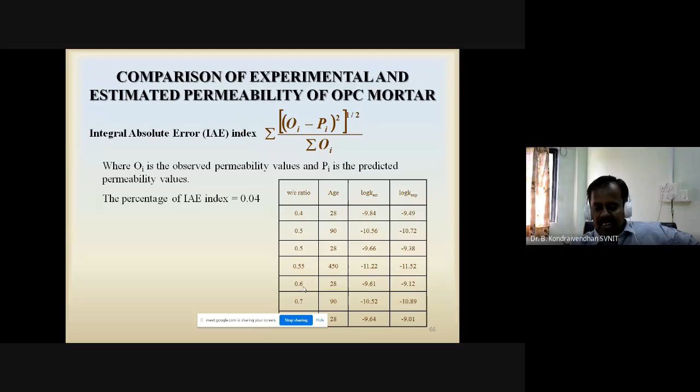So now we also did the integral absolute error index, and here this IAE index is coming to 0.04. That means it is better - up to 10% is okay.

So from this, what I want to conclude is: it is possible to determine the pore size distribution parameters by using the water cement ratio, curing age, and mean cement particle diameter. Once you know the R, S, and D, it is also possible to determine the compressive strength, permeability, and hydraulic diffusivity. And also, once you know the water cement ratio, curing age, and mean cement particle diameter, you can predict the degree of hydration. So all these things we have derived through our exercise - that's what I mentioned in the conclusion.

Now I am actually coming to our cement fly ash system, because we cannot directly come to the cement fly ash system - first we have to start with the simplest thing.

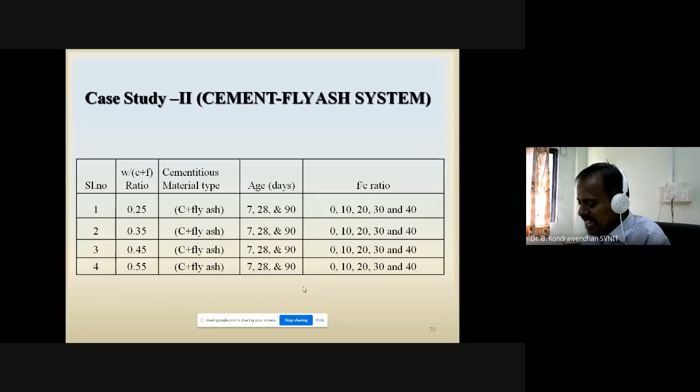So that's why I started with only OPC paste. Now I am coming to the cement fly ash system. Here we use different water binder ratios: 0.25, 0.35, 0.45, and 0.55. We use cement fly ash, and curing age is varied at 7, 28, and 90 days. We replace cement with 4 different percentages: control, 10, 20, 30, and 40 - that is the F by C ratio. That's how we started this cement fly ash system.

Here also we have done a number of tests on the cement fly ash paste and cement fly ash mortar. We also determined compressive strength.

As I mentioned earlier, first we determined the optimum dosage, because our intention is to determine the pore size distribution. So we have to ensure complete dispersion of the cement particles. Otherwise we cannot get complete hydration, because hydration needs some space between the particles. Whenever you use superplasticizer, it gives a negative zeta potential. That's how the cement particles get dispersed properly, and space is available for the inner product and outer product, which we achieve by using the superplasticizer. So we determine the optimum dosage of superplasticizer for the cement fly ash paste and mortar using the Marsh cone test and the flow table test.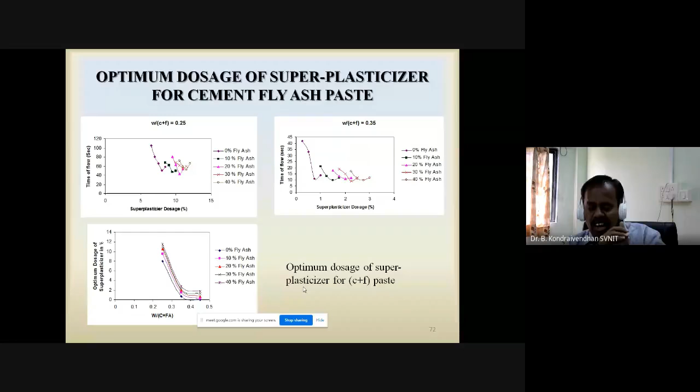These are the optimum dosages. Then we determined the compressive strength. The compressive strength increases even beyond 28 days because of the secondary pozzolanic reaction. The fly ash we used was from the Dadri power plant, around 50 km from Delhi in Uttar Pradesh. From there we got the class F fly ash we used here. That's how we got the compressive strength like this.

But in case of cement fly ash, we are adding one more material, that is fly ash. Then how to determine the degree of hydration? So we referred to some literature. There is one person, Nathan Schwarz and Neithalath, who has conducted work on this degree of hydration. From this we came to know the degree of hydration. The total degree of hydration for the cement fly ash system is nothing but the summation of the degree of hydration of the cement times the mass fraction of the cement, plus the degree of hydration of the fly ash times the mass fraction of the fly ash. That's how we calculated it.

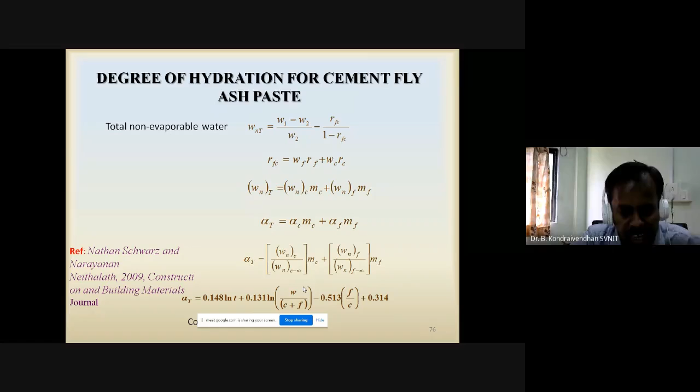We have done a lot of experimental work, and we determined degree of hydration for various water cement ratios and curing ages, and finally we did a least square based regression analysis. Finally we got a total degree of hydration for the cement fly ash paste as a function of curing age and water cement ratio - otherwise I can say W by C plus F, and also F by C ratio. So if you know these three parameters, you can determine the degree of hydration for the cement fly ash system. So we determined the degree of hydration as a function of water binder ratio, F by C ratio, and age.

Okay, and again, how to determine the porosity? Because in case of OPC paste, mortar and so on, the standard formula is available. If you refer to the Neville and Brooks book, it is available - what is the gel porosity, what is the capillary porosity, what is the total porosity. Everything is available in the literature. But in case of the cement fly ash system, nobody has developed this. But by using the theory, we can also develop it. So that's how we attempted it here.

So if you look at the cement fly ash system, what is the volume proportion? We are using cement, fly ash, and water - this is our original volume. VC is the volume of cement, VF is the volume of fly ash, and VW is the volume of water. If you mix everything together, what will happen? What end products will you get? You will get hydration of the cement, hydration of the fly ash, and some unhydrated cement and unhydrated fly ash will be there.

So if you know the initial volume, and if you detect the hydrated and unhydrated product of cement and fly ash, the remaining thing is nothing but capillary porosity. So one can also calculate the capillary porosity. First we calculated the hydrated cement product, then the hydrated fly ash product, and the unhydrated cement and unhydrated fly ash. Then initial volume minus this gives the capillary porosity, and capillary porosity divided by the initial volume gives you the capillary porosity fraction.

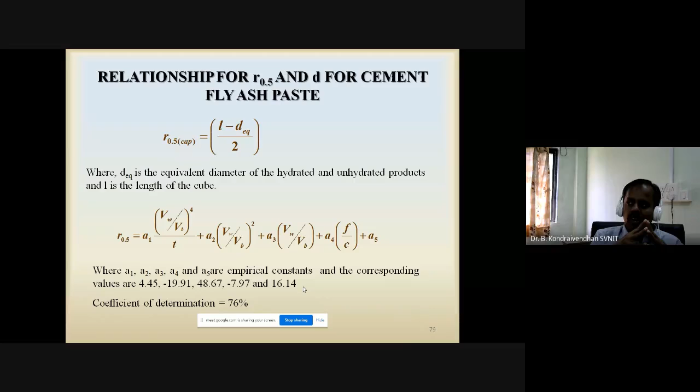Then, beyond the curing age of capillary segmentation, the pores are gel, as I mentioned earlier, so we have to determine the gel entry radius. Initially we tried with the water-cementitious ratio, W by C plus F, but that was not fitting well. That's why we modified it, and we found that volume of water to volume of binder fits well. So instead of water by binder ratio, we use the volume of water to volume of binder ratio, and that's how we got this relation for the r0.5 gel entry radius.

So finally we got the overall r0.5, the same formula I proposed in case of OPC paste. A similar relation was obtained for the cement fly ash paste: R5 is the weighted geometric mean of R5 gel into P gel, and R5 cap into P cap. You can take the LN on both sides to get the second equation. Here P cap and P gel are the fraction of the capillary and gel porosity to the total porosity.

Then, in a similar manner to what was established for OPC paste and OPC mortar, we have also done the dispersion coefficient model, where the dispersion coefficient is a function of water binder ratio and curing age. We also established the relationship for the dispersion coefficient.

Now we have to look at the application, because once you model the pore size distribution parameter, what is the implication or application? We already established the relation between the pore size distribution parameter and strength in case of OPC paste. Here we slightly modified it: instead of using only C, we add F also, so the formula becomes sigma equal to K into C plus F. Instead of C, I use C plus F. The remaining things are the same as before.

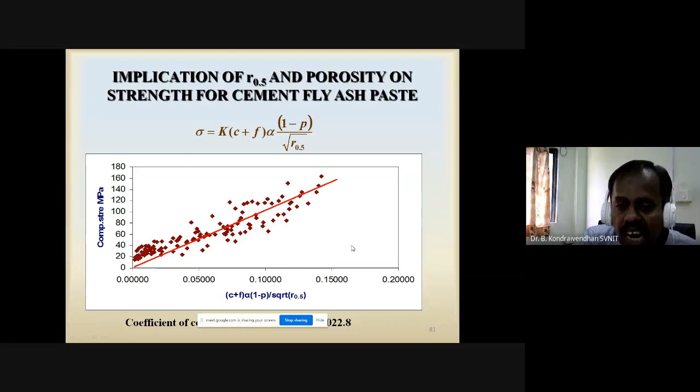Then, to determine the constant of proportionality K, we took a number of experimental data points and plotted the experimental compressive strength data versus C plus F into alpha into 1 minus P divided by the square root of r0.5. That's how we got the K value. Using this value, we can predict the compressive strength of the cement fly ash paste. Then we also checked Abrams' law.

Abrams' law states that strength is inversely proportional to water cement ratio. We are getting the same trend for different water-binder ratios, different curing ages, and different F by C ratios. We have done this exercise for all these cases and got a similar trend. This is also correct, so we can ensure that.

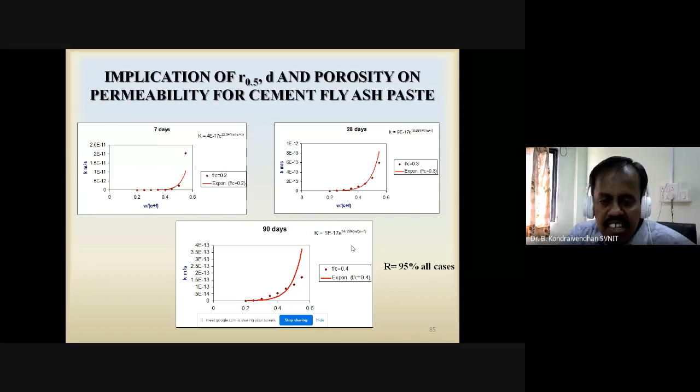This kind of work has also been carried out for cement fly ash paste, and we determined the permeability as well. We plotted permeability versus water binder ratio, and this follows the same trend mentioned by TC Powers et al. We also determined the hydraulic diffusivity for both wetting and drying cycles, and this also follows the same trend as mentioned by Hall et al. Both wetting and drying cases fall into the same category.

Then we moved on to cement fly ash mortar. Here again there's a problem, because once we introduce sand, there is no ITZ porosity quantification available in the literature. Doing this is very voluminous work, because we have to change the paste content and use different volume proportions of aggregate—that requires separate research. Initially we took only one paste content; we would need more paste content relative to the void ratio, and that exercise has not been done.

That's why it is not possible to do the modeling in case of the cement fly ash mortar. So instead we did empirical modeling only. Here we got r0.5 as a function of water binder ratio and F by C ratio, and D also as a function of water binder ratio and F by C ratio.

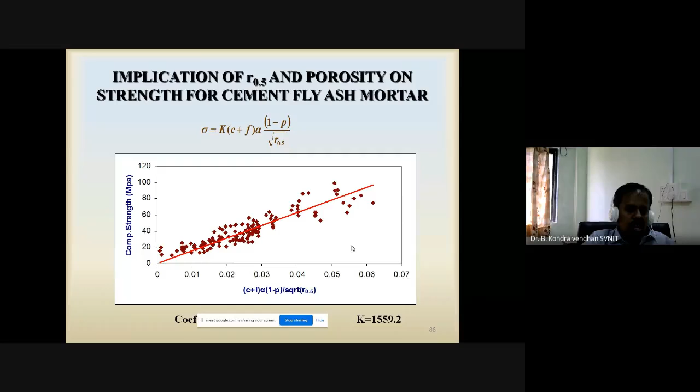Then we did a similar exercise, determining compressive strength versus C plus F into alpha into 1 minus P divided by square root of r0.5. We calculated the constant of proportionality K, which came out to 1559.2. Using this, we can estimate compressive strength for different water cement ratios and curing ages, and one can also check Abrams' law.

We put all the data together and got one common relationship for the cement-based material. In that case we got K as 1081.6. That kind of exercise we have done, and we also extended this work to permeability and hydraulic diffusivity.

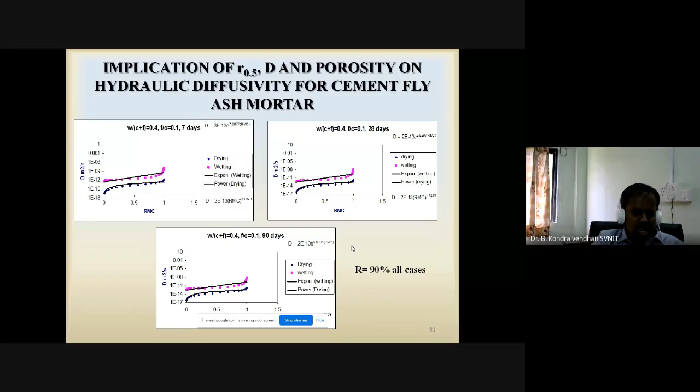In the case of permeability also we got a similar trend. We plotted permeability versus water binder ratio, and this also shows the same trend predicted by TC Powers in 1960 for different water binder ratios. This work was also extended to hydraulic diffusivity for both wetting and drying cycles, with hydraulic diffusivity versus relative moisture content given in the graph. Here too, if you look at the equation, it matches the equation given by Hall et al. for hydraulic diffusivity.

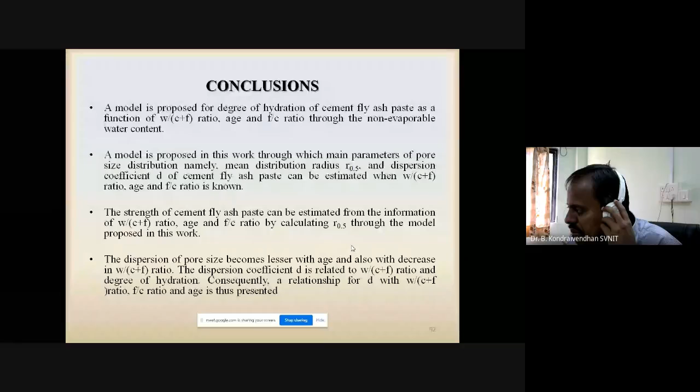From this, what I want to conclude is that in the case of the cement fly ash system, it is also possible to predict the pore size distribution parameters like r0.5, dispersion coefficient D, and permeable porosity P. We developed a model for porosity since it wasn't available in literature, and we also developed models for r0.5 and the dispersion coefficient. All these parameters are functions of simple mix factors only—water cement ratio, curing age, mean cement particle diameter, and here we also use the F by C ratio. Using this, we can predict the pore size distribution parameters, and once known, it is also possible to predict compressive strength, permeability, and hydraulic diffusivity. So this is possible—these are all the works carried out for cement fly ash paste and mortar.

Now I am coming to the last part of my presentation, which is for concrete. So far I have talked about the simplest systems like paste and mortar; it's also possible to do this for concrete. For that, this work was actually carried out by one of my friends at IIT Bombay, Dr. B.B. Das, who now works at NIT Surathkal. He has carried out this work.

So what he did, he used crushed concrete chunks for different grades of concrete. He used PPC cement and did three grades of concrete. He tested the concrete samples at 1, 3, 7, 28, 56, and 90 days, and determined the pore-size distribution parameters. Using these parameters, he also calculated compressive strength, permeability and hydraulic diffusivity. Here, since the sample size is very small in concrete, instead of taking a core, he used crushed chunks of the aggregate with cement matrix.

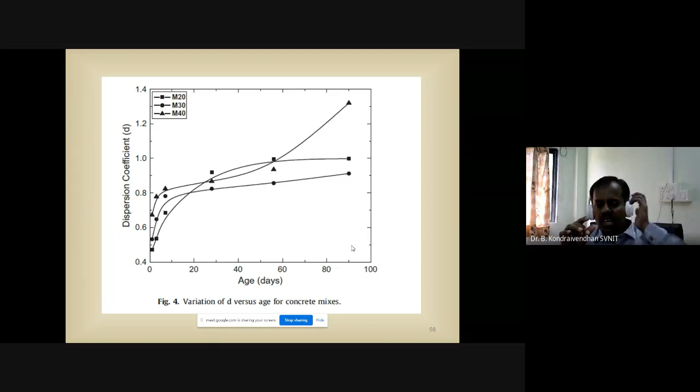Then he plotted the mean distribution radius versus age for M20, M30 and M40 grades. He also calculated the dispersion coefficient for all three grades and plotted dispersion coefficient versus age. This shows the same trend, because the dispersion coefficient increases over time due to the progression of the degree of hydration. He also determined the constant of proportionality.

Once we determine the pore-size distribution parameters, we determine the relation and application - how we can determine the compressive strength. As mentioned earlier, sigma equals Kc times (1 minus p) divided by square root of r0.5. Here we should not use alpha; alpha is applicable only for paste and mortar. So directly you can determine the K value using your compressive strength data versus C(1-p)/sqrt(r0.5).

This K value comes out to 100,796.1. He also extended this to permeability and hydraulic diffusivity, plotting hydraulic diffusivity versus relative moisture content for both wetting and drying cases.

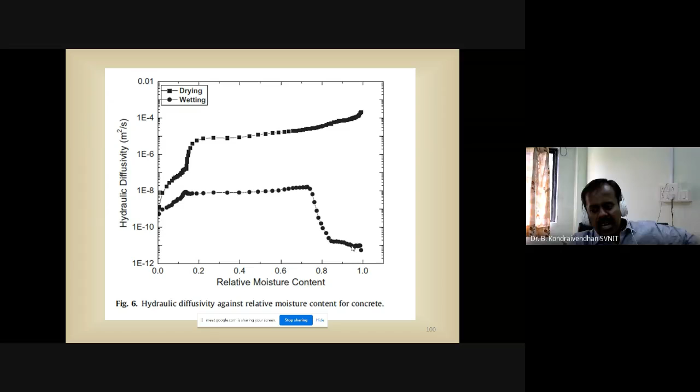So this researcher actually did only experimental work, but he extended it to determine, using the experimental pore-size distribution parameters, the compressive strength, permeability and hydraulic diffusivity. He has not done any modeling. There is scope for someone to do modeling for the concrete pore-size distribution parameters as well, and maybe in future I am planning to extend this work for concrete too.

Whatever I presented here has all been published in world-reputed journals like ACI Materials, which is the number one journal in civil engineering. Other leading journals include Magazine of Concrete Research, Materials Characterization, and Construction and Building Materials. All the details are available in the literature - all published in leading journals. Whatever data I presented, you can refer to those literatures to get all the details.

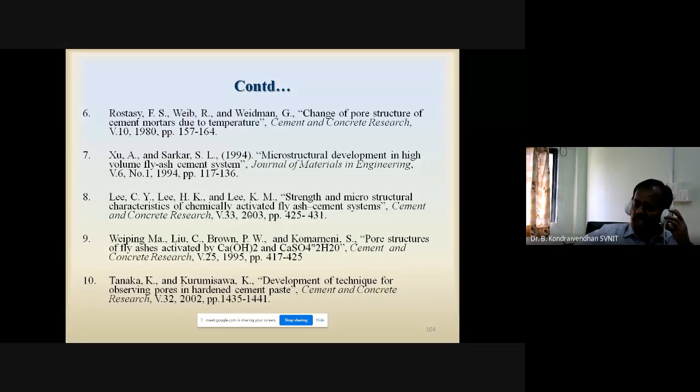There are also a few conferences where we have published; these are some of the references. I think this kind of work can be extended to different kinds of concrete, because this is only the starting stage. This has been recognized by the international scientific community - it is possible to predict the compressive strength of concrete using microstructure or pore structure parameters. That is what I want to conclude from this literature.